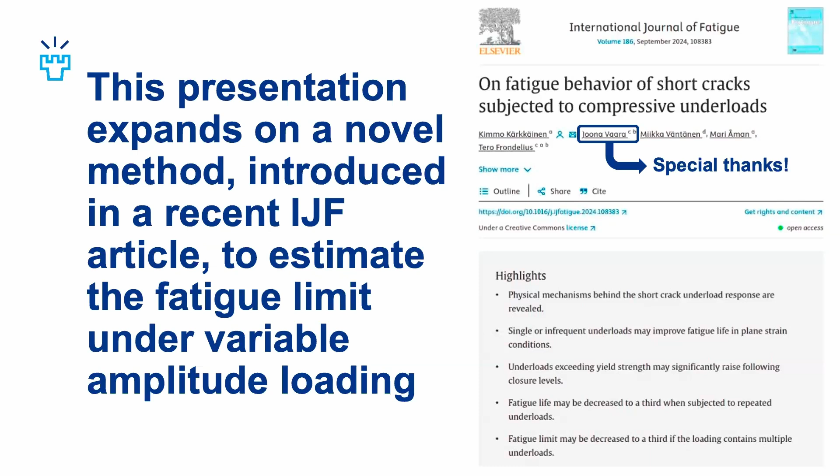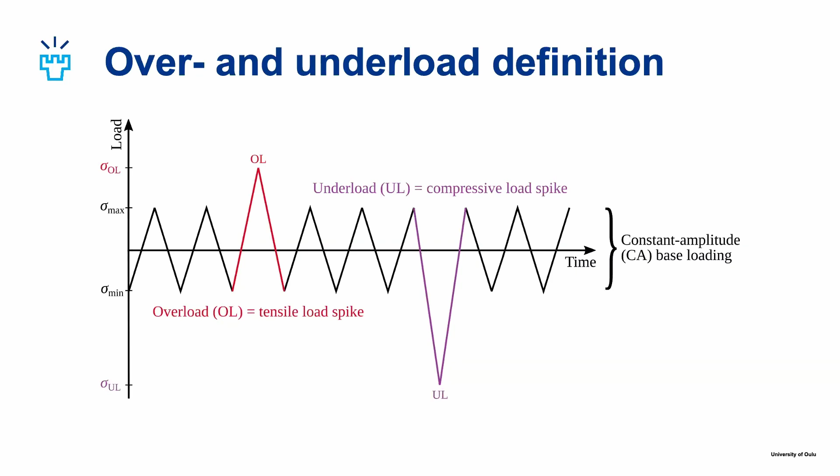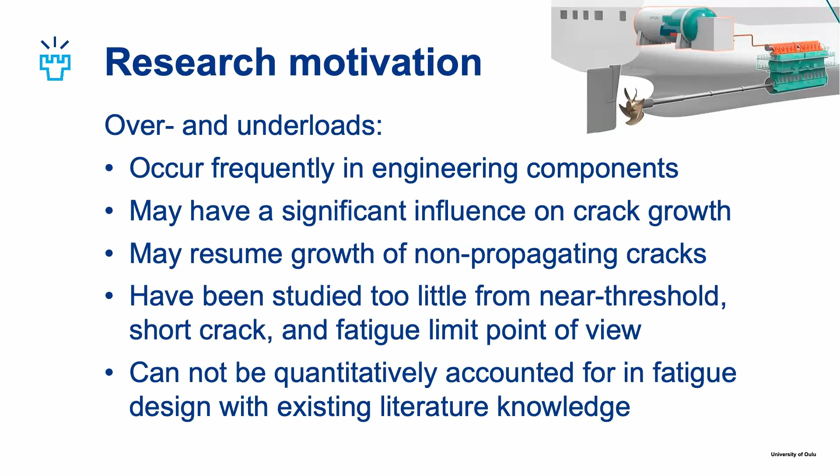First of all, to define overload and underload: overload is a tensile loading spike, and underload is a compressive loading spike in the otherwise constant amplitude base loading. They tend to occur quite frequently in engineering components and may significantly influence crack propagation, and they have been studied quite little from the fatigue limit point of view—there's nothing really in literature to account for them quantitatively in estimation of the fatigue limit.

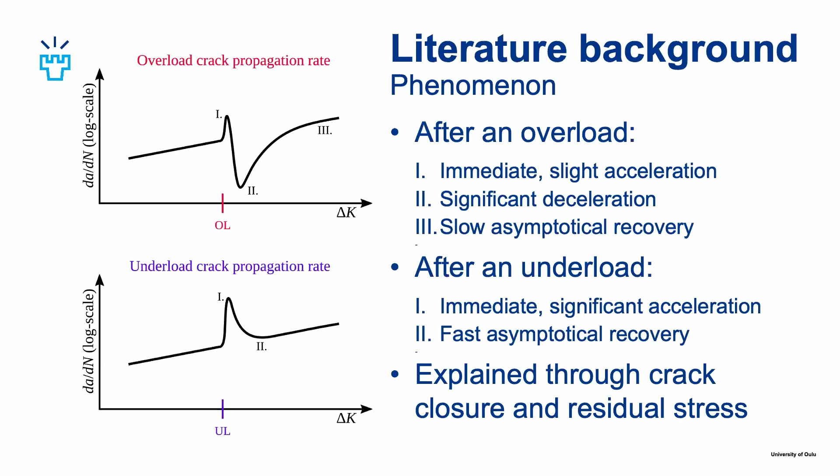Usually what we observe in terms of crack propagation rate after an overload is a delayed significant deceleration, and after an underload there's usually a more immediate acceleration effect. These are mostly explained through crack closure and residual stresses, which basically both stem from crack tip plasticity. So the general categorization is that overloads are good, but underloads are bad.

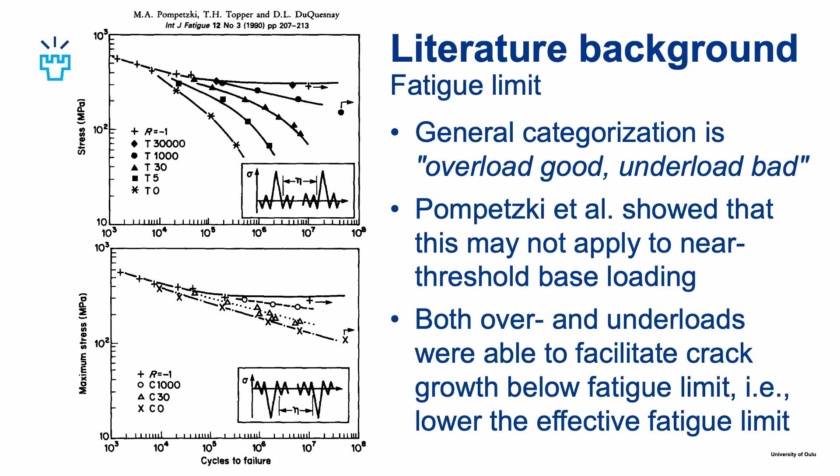But this may not necessarily apply to near threshold base loading, as was suggested by the results of Pompetzki and colleagues in the 90s. They showed that both over and underloads were able to facilitate crack propagation below the fatigue limit, so essentially lower the effective fatigue limit.

We read about the resistance curve, which is a tool that is going to be used in this analysis. It's a simple and effective method to depict the development of crack propagation resistance, which is basically thought to consist of crack closure, and it carries information on the fatigue limit and links to the Kitagawa-Takahashi diagram, and so on.

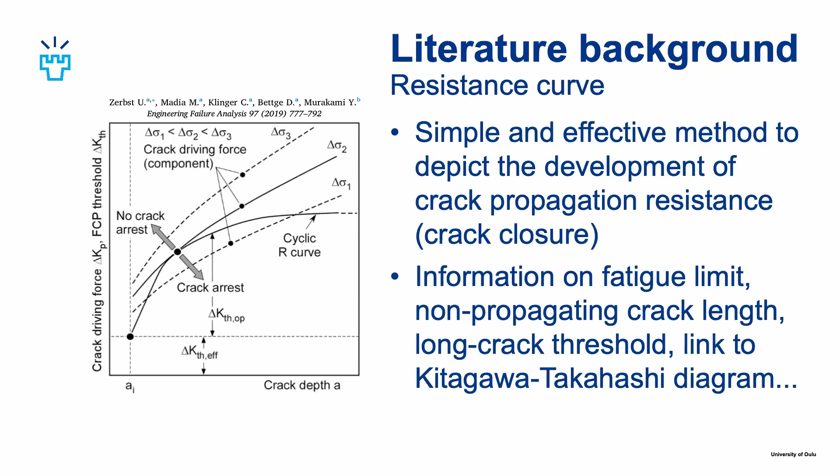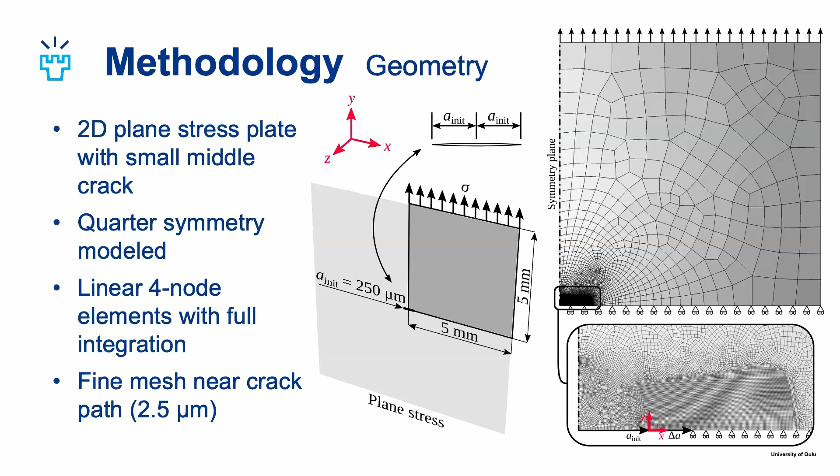So first we will use this very simple finite element model to simulate the crack closure response to overloads and underloads. This is a two-dimensional plane stress plate with a 0.5 millimeter middle crack, and quite a fine mesh near the crack path to adequately capture the plasticity.

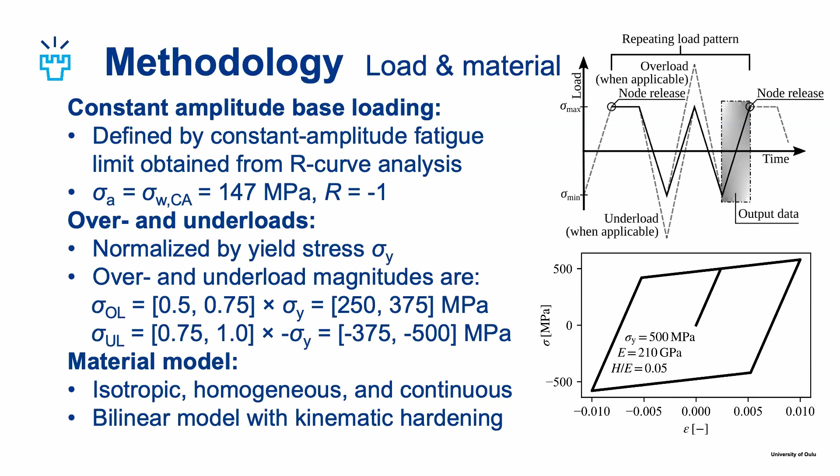The material model is quite simple, just a steel bilinear model with kinematic hardening.

This is how the crack will propagate in the model. It's realized by releasing the current crack tip node, so the crack always jumps one element forward at a time. This occurs at maximum load every other load cycle, and the final crack length is such that the initial crack size is doubled.

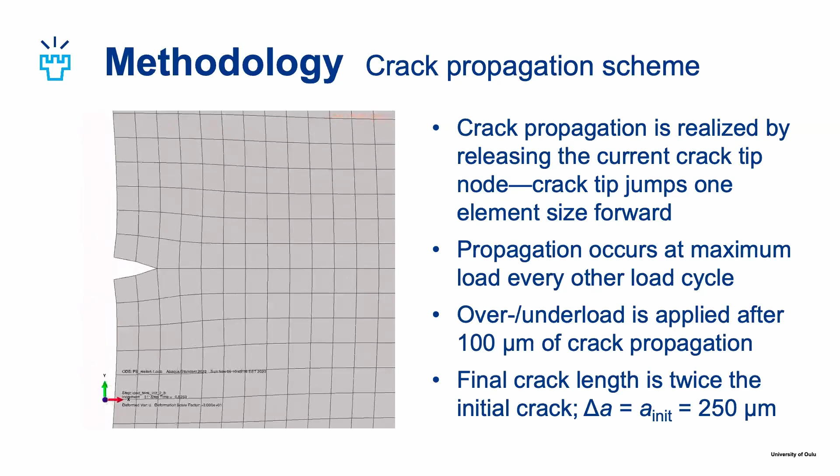These are the crack closure results, presented in terms of the opening level as a function of crack extension. You can see the loading spikes applied at the 0.4 mark, and with overloads we observe a somewhat delayed increase in closure, which is expected, while underloads cause what is basically just a resetting of the closure development.

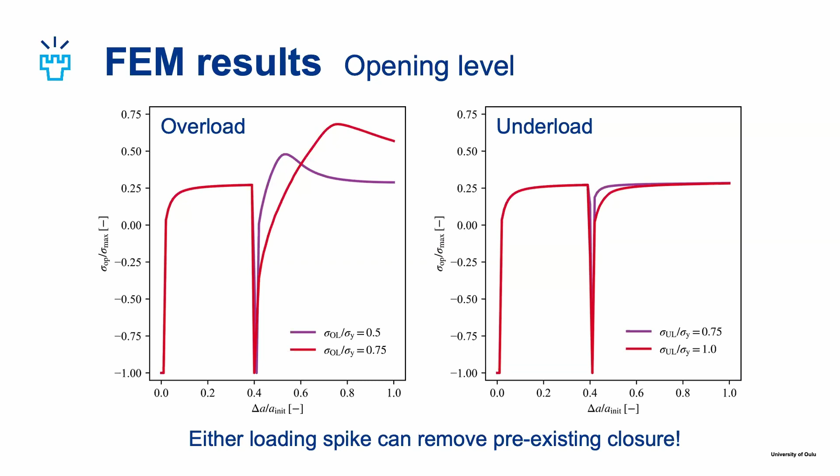But what is very important in terms of this study is that both loading spikes can basically remove the pre-existing crack closure momentarily. That is due to crack tip blunting that not only occurs with overloads but with underloads also. With overloads it's caused by the large plastic zone ahead of the crack tip, and with underloads it's actually the reverse plasticity of the pre-existing crack flank that causes this.

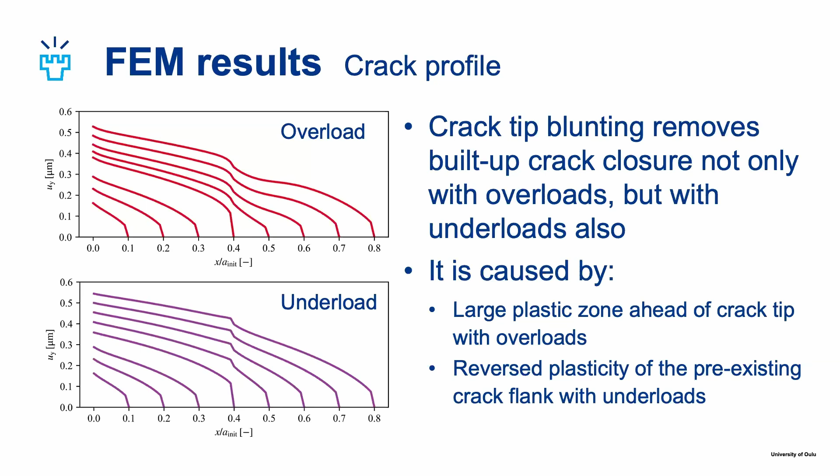Here in the crack profiles you can see the loading spike is applied at the 0.4 mark, and you can see a kink in the crack profile in both the overload and underload case, which is indicative of crack tip blunting and will remove existing closure. With underloads, if the underload magnitude is high enough, it can be even so that the entire plastic wake is basically completely removed.

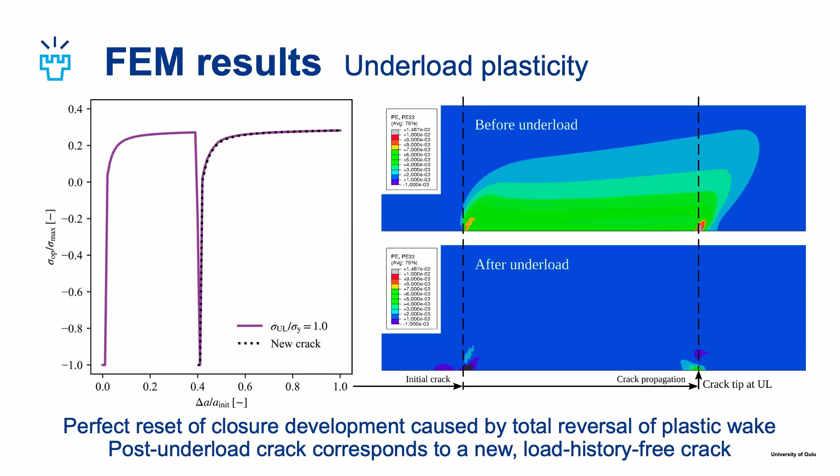This state now corresponds to a new crack without any loading history, and you can see with the closure development that in this case the post-underload closure development corresponds exactly to that of a new crack, because the state is effectively equivalent.

So what is now the effect on fatigue limit when these loading spikes are recurrently applied? For this we will need the resistance curves, and we know that the closure development should correspond to the resistance curve, and also the resetting of closure should correspond to the resetting of the resistance curve.

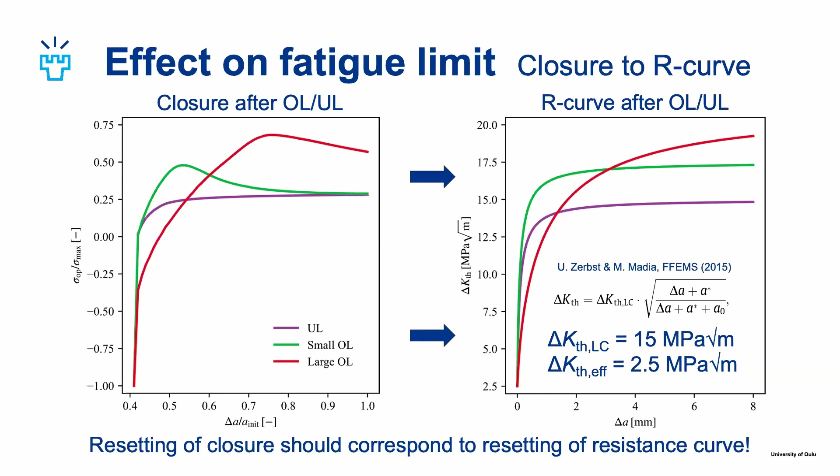With underloads, we saw this basically just a pure resetting of the closure development, so we will use this default resistance curve for that. But with the overload cases, the closure resistance curves are modified a little bit to correspond to the predicted closure response. So this is basically the analysis foundation: that the resistance curve would be reset by a loading spike.

And the shape can be altered by an overload, but not by an underload. So now the question is: when is a loading spike applied? If we have some load level that is below the constant amplitude fatigue limit, and we assume relatively rare events of these loading spikes, then the most likely place that the loading spike is experienced is in the state where the crack is non-propagating.

So basically what happens here is that the crack will extend from the initial crack until it hits the resistance curve. So now this state is the one that the crack will probably spend the majority of its time. So we can assume that the loading spike and underload in this case is applied there.

So when the underload is applied, then the resistance curve is reset, and now the crack can continue its propagation until it hits the new resistance curve. And this can go on and on until the loading curve, the delta K curve, no longer intersects with the resistance curve, and then we know that we have surpassed the fatigue limit for that specific number of loading spikes, and the crack is let loose, and the component or anything will fail.

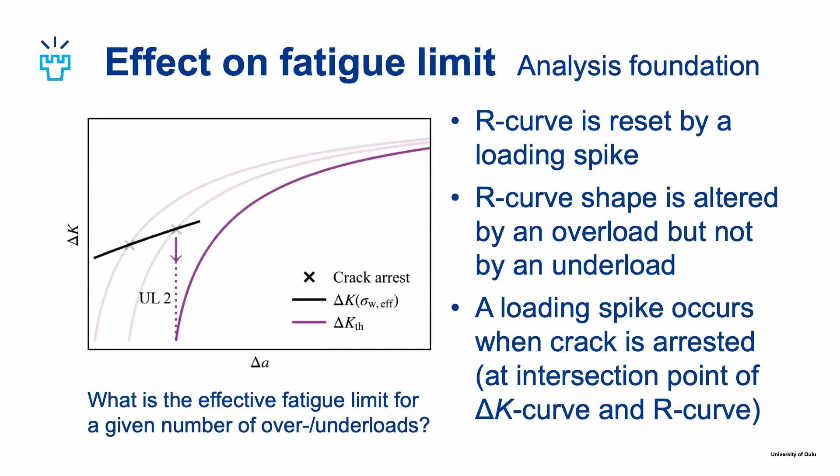So now the question becomes: what is the effective fatigue limit for a given number of over and underloads? Well, that we can answer by throwing some equations at it. So basically this problem can be solved with a system of closed form equations that is able to be numerically solved.

For each intersection point between the loading curve and the resistance curve, there must be this equality condition between them fulfilled, and in the resistance curve formula there's this parameter a* that will shift the resistance curve based on the intersection point, the non-propagating crack length of the previous state. And if we are at the effective fatigue limit, then we know that the loading curve must be a tangent of the final resistance curve. So there's additionally one tangency condition.

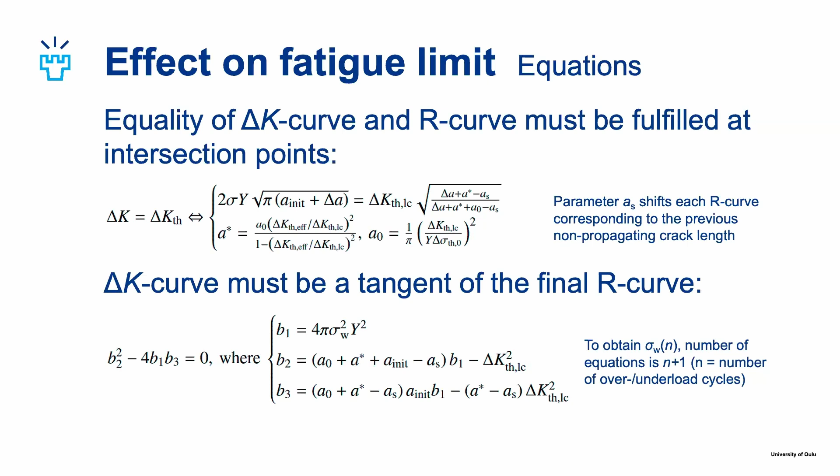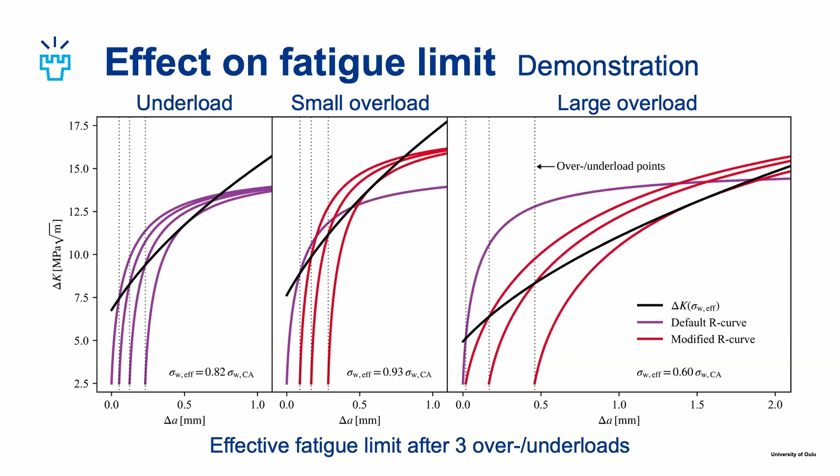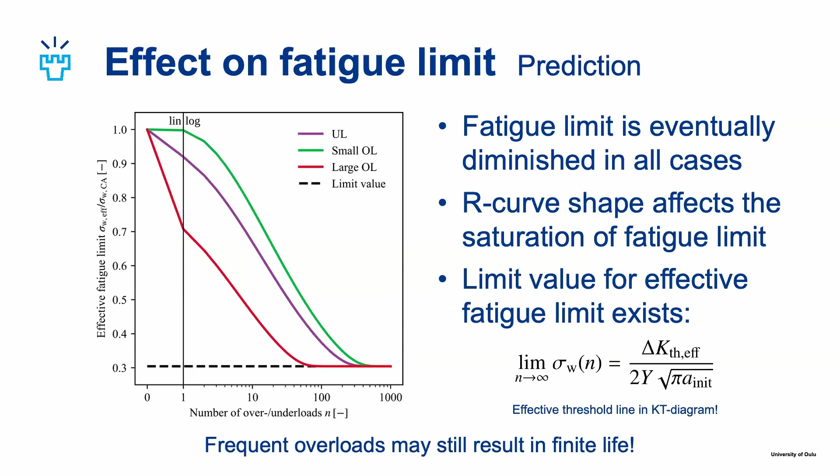But what this study does not consider is that frequent overloads may still result in finite life. So this assumes rare overloads, and the damaging effect of the overload cycles themselves is not considered.

So jumping into the conclusion: these recurrent loading spikes are very detrimental to fatigue limit and can even cause a decrease down to 1/3 of the constant amplitude fatigue limit with enough loading spikes. And both over and underloads can remove the existing closure and essentially reset the resistance curve. And these large overloads, basically the resistance curve shape can depend on the loading spike.

So these large overloads may delay the saturation of the resistance curve and significantly promote the decline of the fatigue limit, which however saturates with enough loading spikes, and the limit value is governed by the intrinsic threshold and initial crack size. But keep in mind that this assumes only rare overload, so the damaging effect of the actual overload cycles will exist in addition to this demonstrated fatigue limit reducing mechanism.

So ultimately it can result in finite life in the overload case.